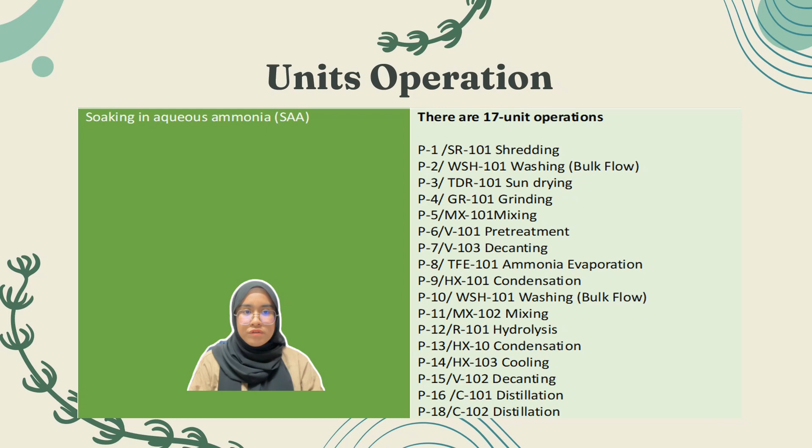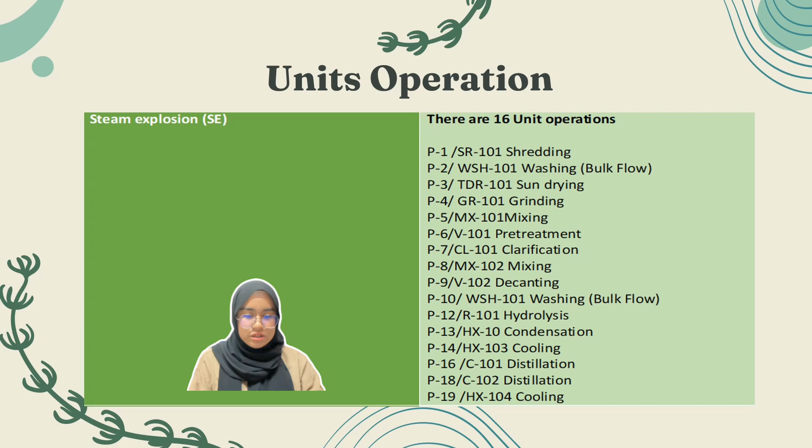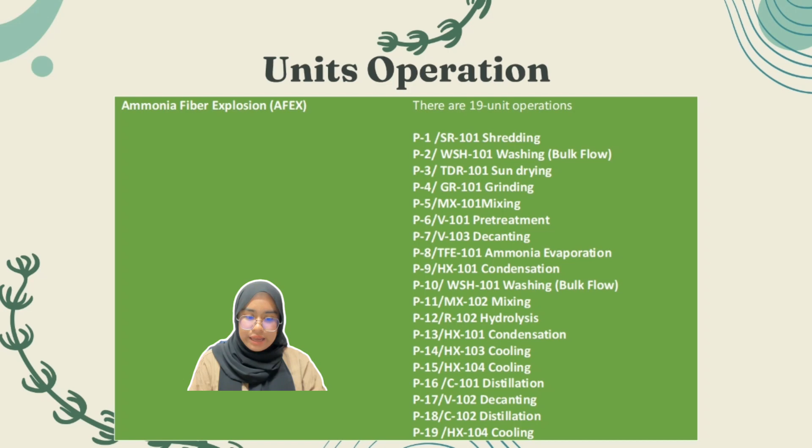This simulation is conducted using SuperPro Designer version 9.5 software. The SAA method has 17 units of operation, while steam explosion has the least, using 16 units. Ammonia fiber expansion has the most, with 19 units of operation. The difference is that the SE method uses a clarification unit operation, while SAA and AFEX use an ammonia evaporation unit operation, since both use ammonia for pre-treatment.

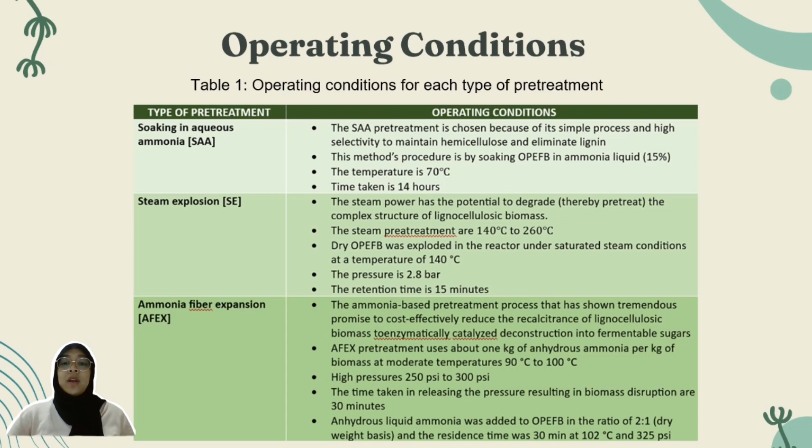Anhydrous liquid ammonia was added to OPEFB in the ratio of 2:1 dry weight basis, and the residence time was 30 minutes at 102 Celsius and 325 psi.

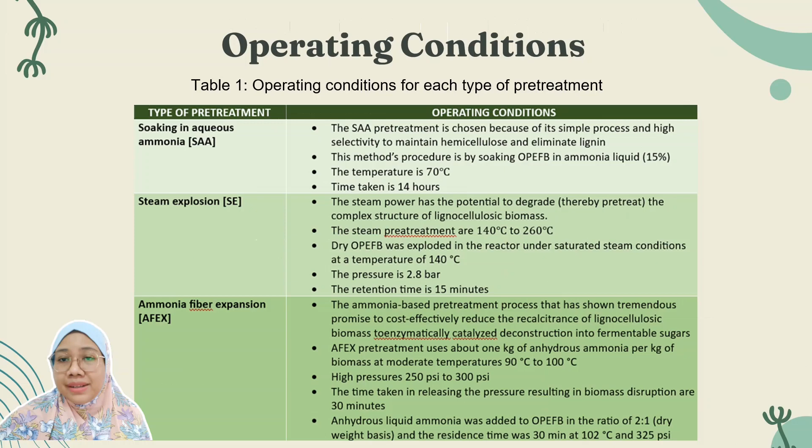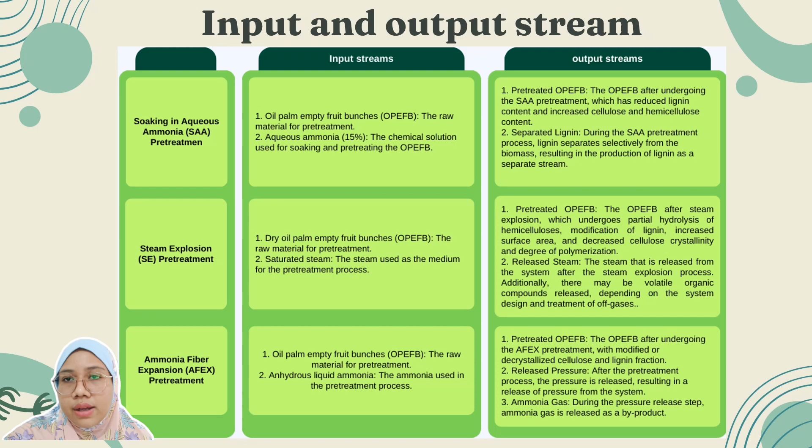The ammonia fiber expansion pretreatment method requires OPEFB and anhydrous liquid ammonia as input. The OPEFB is loaded into a high-pressure stainless steel reactor and the reactor lid is closed. Anhydrous liquid ammonia is then added to the OPEFB, allowing pretreatment under certain conditions. The output stream includes treated OPEFB with modified cellulose and lignin fraction. During the pressure release step, the system releases pressure and ammonia gas as a byproduct.

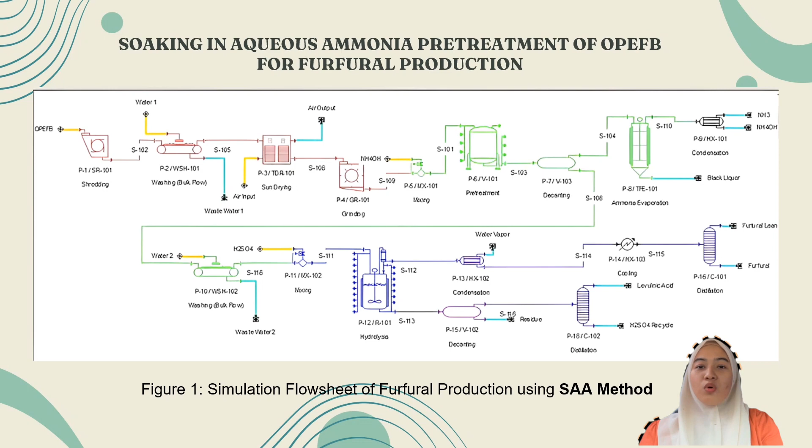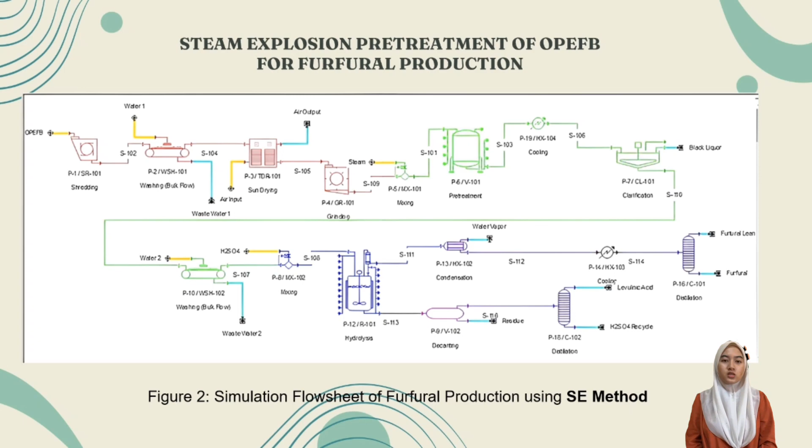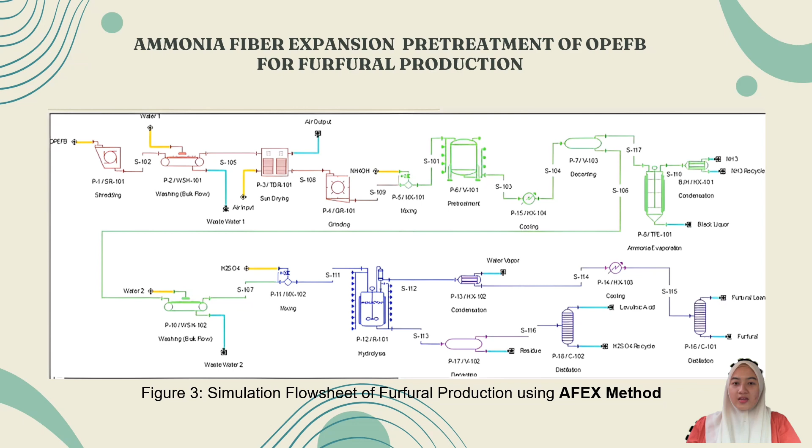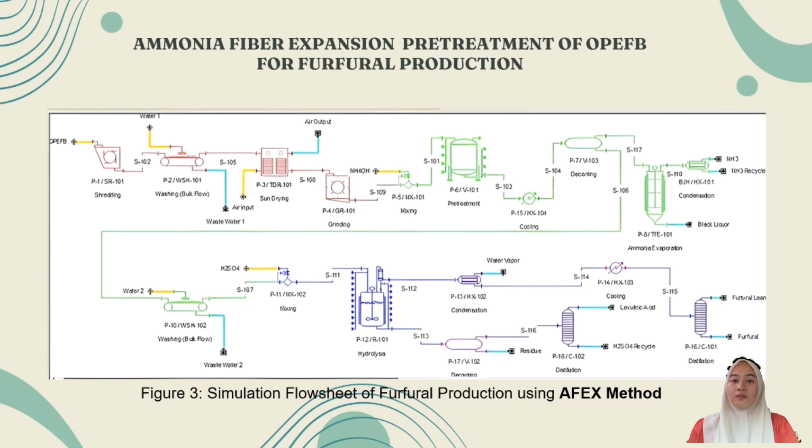This treatment is more economical. This treatment is similar to SAA and SE methods but more complete. This method starts with shredding, washing bulk flow, sun drying, grinding, mixing, pretreatment, cooling, decanting, ammonia evaporation, and condensation. The decanting also goes to washing bulk flow 2 (P10), mixing, hydrolysis, condensation, cooling, decanting, and two stages of distillation.

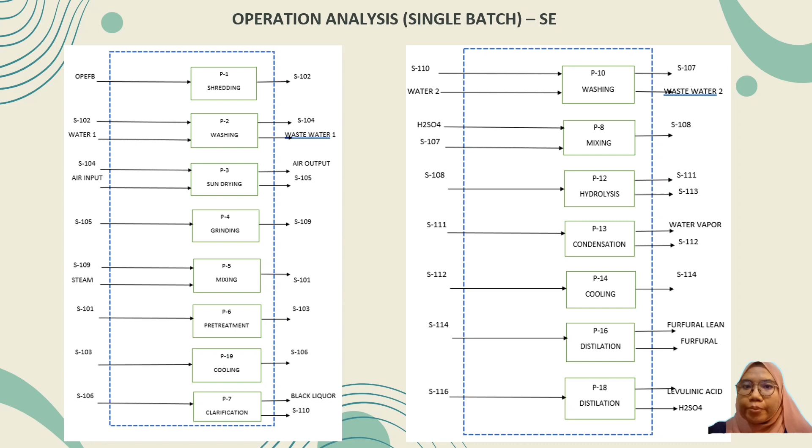Next, for the operational analysis, we define the system boundaries for all three methods. The first system boundary is the soaking in aqueous ammonia (SAA) system. The second boundary is the steam explosion pretreatment (SE), and the last one is the ammonia fiber expansion (AFEX) boundary system. All these boundary systems involve processes such as shredding, washing, sun drying, grinding, mixing, pretreatment, decanting, ammonia evaporation, condensation, hydrolysis, cooling, and distillation.

The majority of inputs for these three systems include oil palm empty fruit bunch (OPEFB), water, air, ammonium hydroxide, and sulfuric acid.

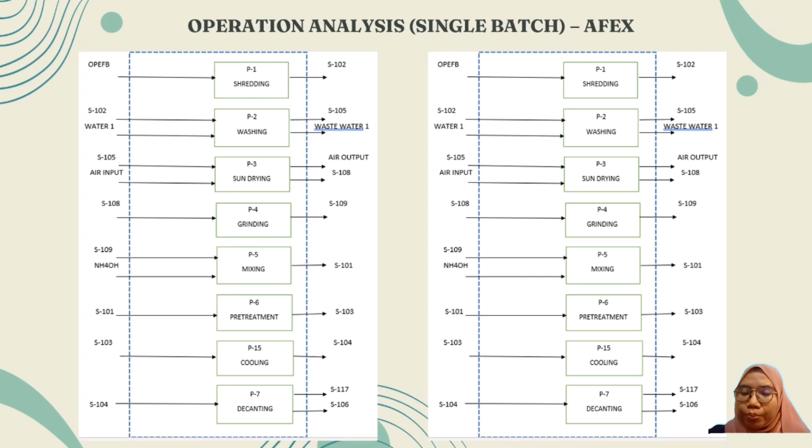As for the outputs, they mainly consist of wastewater, air emissions, water vapor, furfural, levulinic acid, and sulfuric acid.

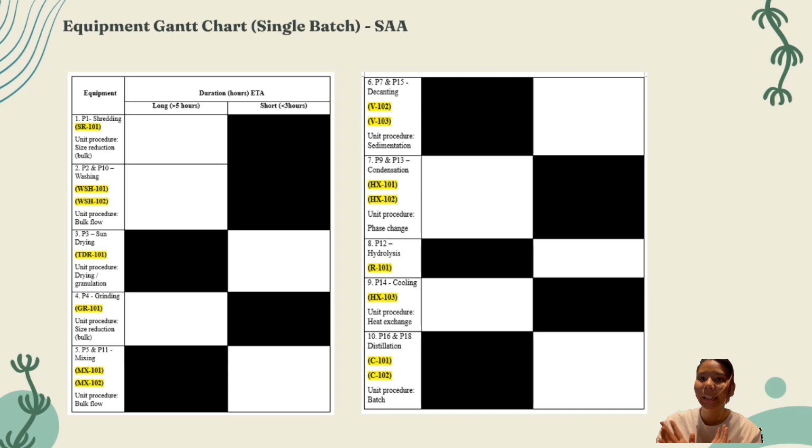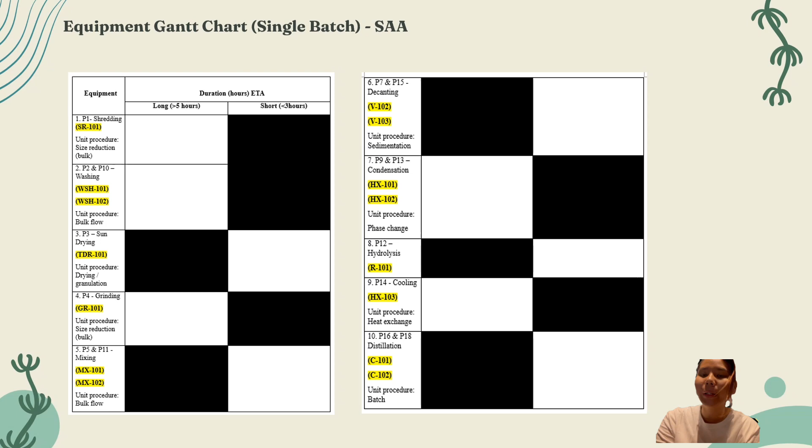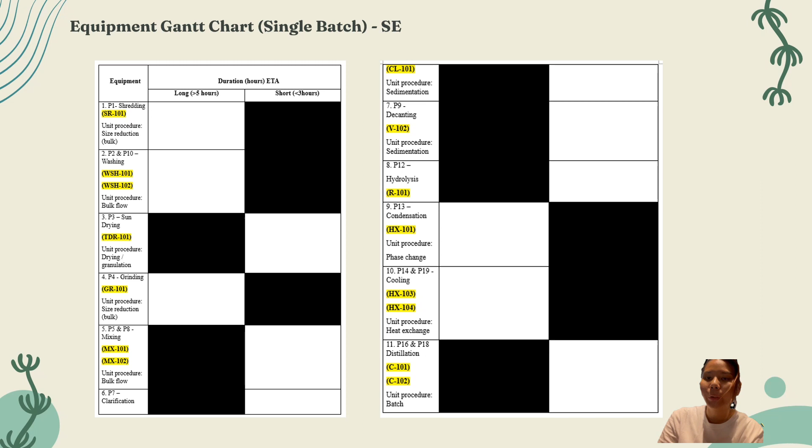My part will be the equipment Gantt chart, which involves 3 pre-treatment methods: the first one is SAA, stands for soaking in aqueous ammonia. The second one is steam explosion, stands for SE. And the third one will be AFEX pre-treatment, which stands for ammonia fiber expansion.

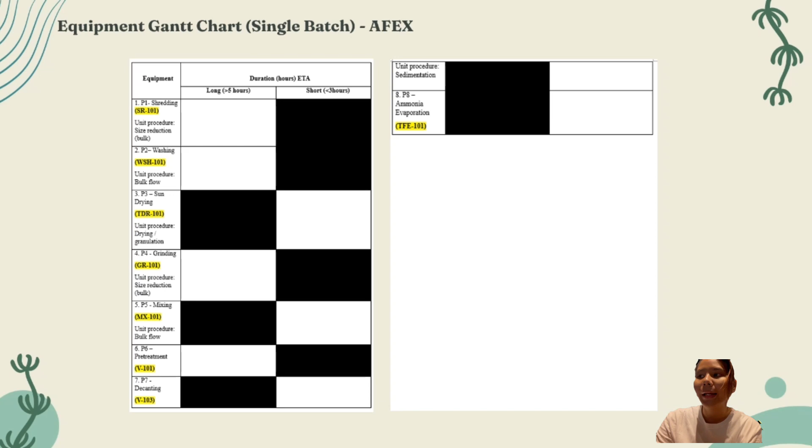Among all these 3 pre-treatment methods, the most economical one will be the AFEX pre-treatment method because it only involves 8 equipment processes, which is the first one is the shredding, followed by washing, sun drying, grinding, mixing, pre-treatment, decanting, and also the last one is ammonia evaporation. That's all for me.

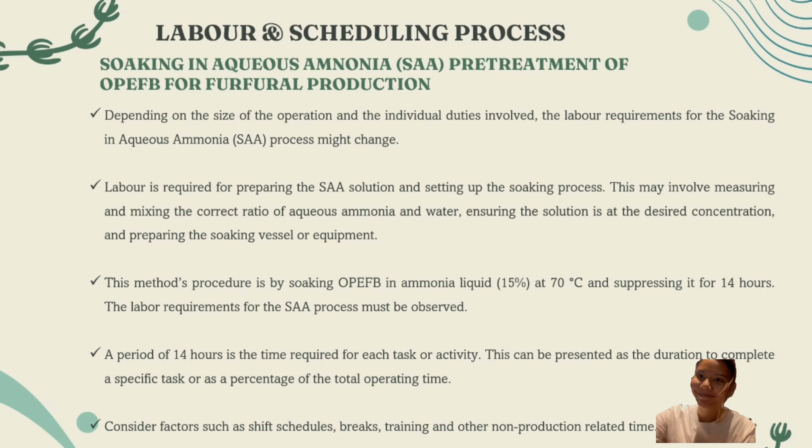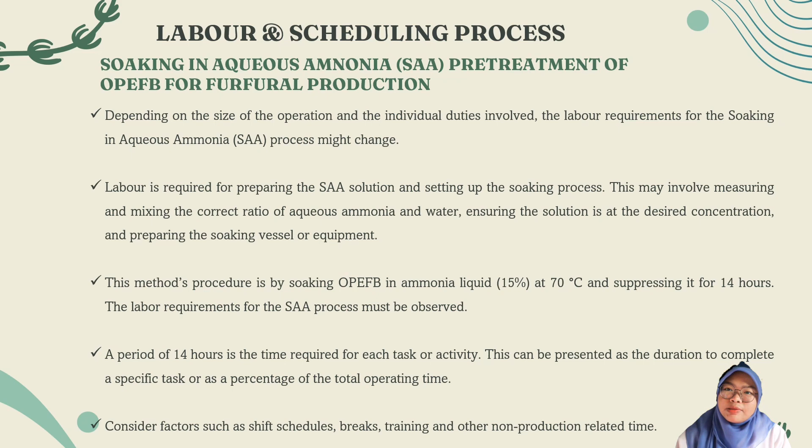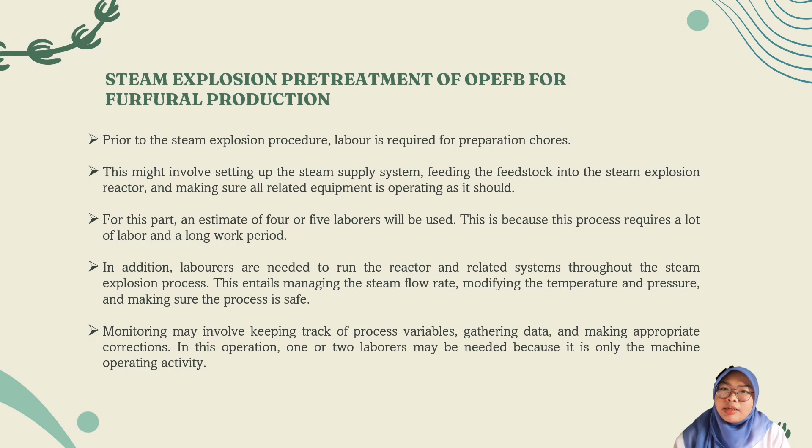The success of every company depends on the effective use of labor. To maximize efficiency, cut expenses, and meet organizational goals, it entails strategically distributing and controlling the personnel. Company may guarantee that labor resources are used in the most effective and efficient way by properly planning and scheduling the job. This includes delegating activity according to the employee's workload and experience, in addition to putting in place production and technological environments that improve workflow.

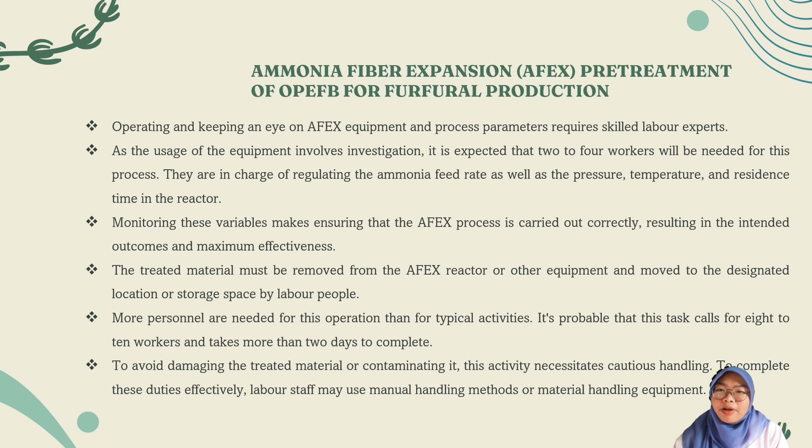In addition, spending money on staff training and development may improve their ability and raise productivity as a whole. Companies may increase productivity, cut waste, and ultimately spur corporate expansion and profitability by properly controlling their use of labor.

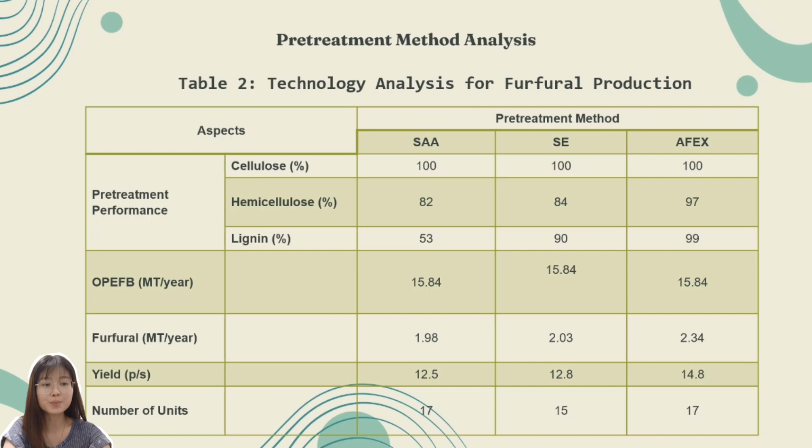For the pretreatment technology analysis, we can say that AFEX pretreatment gives the highest hemicellulose recovery, so it also gives the highest production yield, which is 14.8%, compared with SAA and SE, which give a yield of 12.5% and 12.8%. However, AFEX pretreatment requires more solvents than SAA pretreatment because it uses anhydrous ammonia. Meanwhile, SE pretreatment gives the lowest number of units because there is no ammonia recycling process. SE pretreatment also gives the highest utilities needed and waste production.

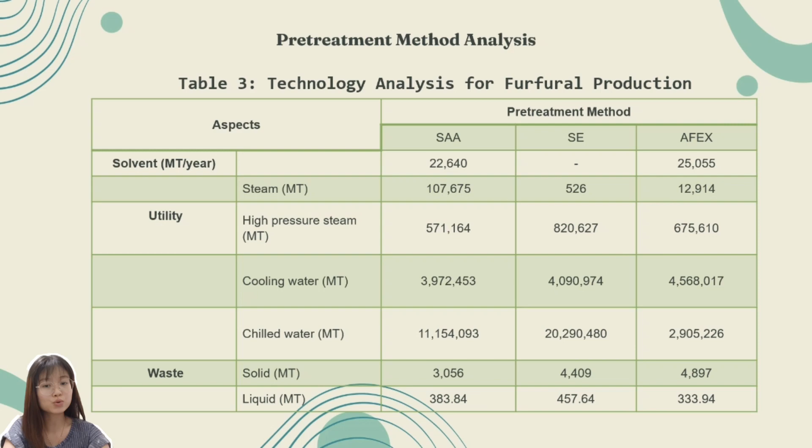Moreover, from this table, we can see that there is a summary of the pretreatment methods, and according to different aspects including solvent, utilities, and also waste.

Meanwhile, OPEX is a cost incurred by a company to carry out production and other supporting activities within the year. OPEX components are raw materials, oil palm empty fruit bunches, ammonia, sulfuric acid, water, labor, auxiliary facilities, laboratory, waste treatment, and also utilities. OPEX value obtained annually for SAA pretreatment is dominated by raw material costs.

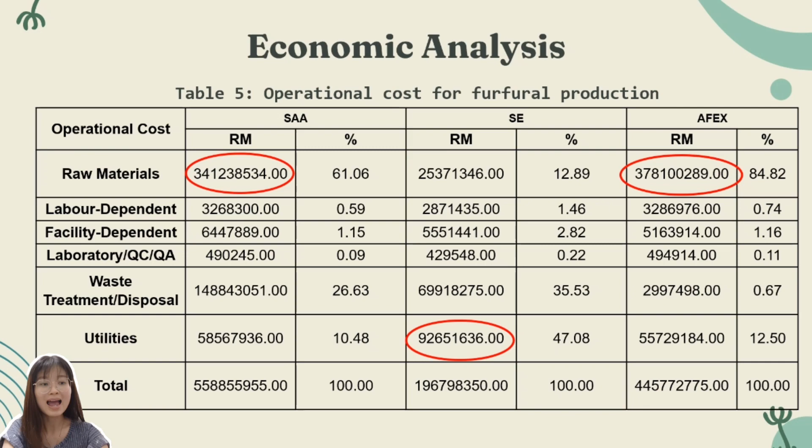Meanwhile, OPEX values of SE pretreatment is dominated by utility costs, and OPEX value of AFEX pretreatment is dominated by raw material costs.

And the three variations of pretreatment for furfural production from oil palm empty fruit bunches can be considered economically feasible from the profitability parameter values. This can be seen from the value of net present value, NPV, which is greater than 0, and the value of internal rate of return, IRR, is greater than weighted average cost of capital, WACC, which is equal to 9.6.

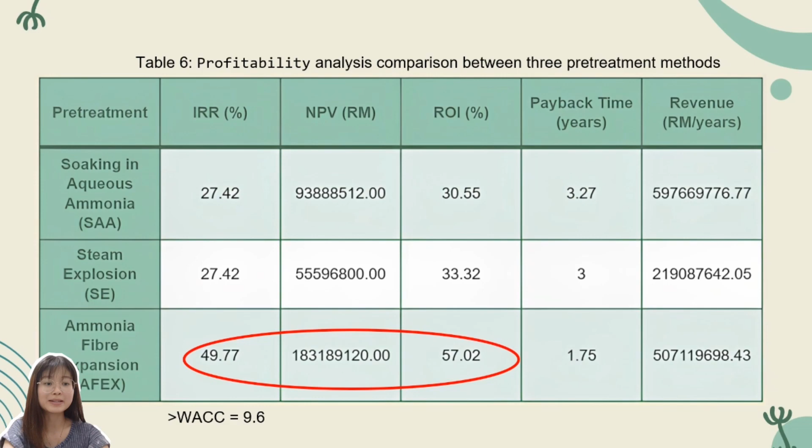Meanwhile, furfural production from oil palm empty fruit bunches with AFEX pretreatment is more economical than furfural production with SAA or SE pretreatment. This can be seen clearly from the better value of AFEX pretreatment's profitability parameters, with greater ROI, NPV, and IRR values, and shorter payback periods.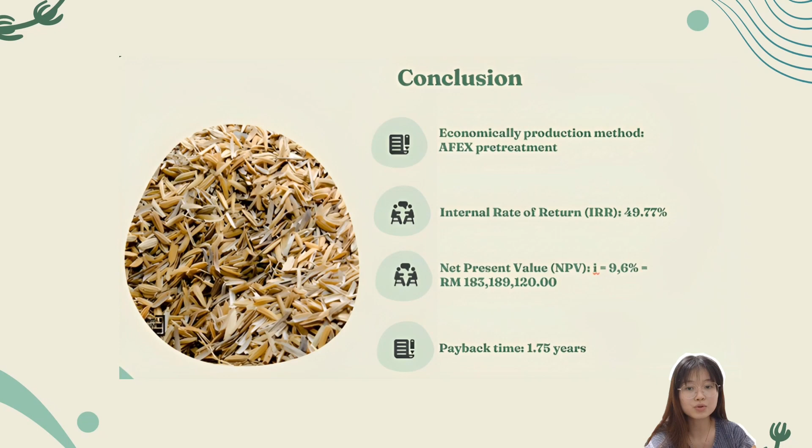In conclusion, this study shows that furfural production with AFEX pretreatment is more economically feasible than with SAA and SE pretreatment, by the value of profitability parameters as follows: internal rate of return, IRR, equal to 49.77%, net present value, NPV, at 183 million, and payback time equal to 1.75 years. This study also found that the most sensitive parameter that affects the NPV, IRR, and also payback time significantly is production capacity. Thank you for listening.